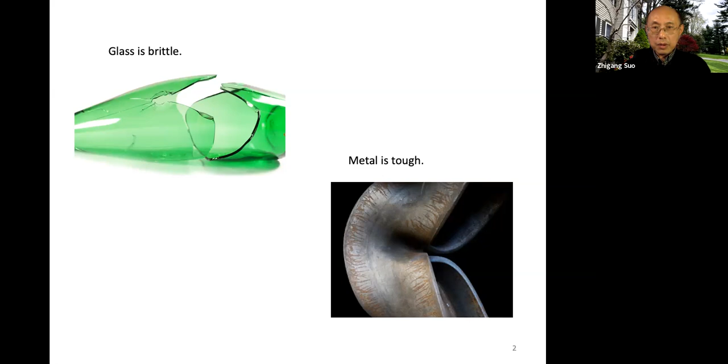All right. So in mechanical engineering, we all know glass is brittle, it shatters, and metal is tough, it deforms plastically. So that's a common experience. Now for rubber, this rubber here seems to be different from glass and steel in some obvious ways, right? It's elastic. And it doesn't have much plasticity. So that's a third kind of thing. So in my field, I'm really particularly interested in something called toughness.

So if you have taken a course on fracture mechanics, or actually if you shatter anything, you know things will fracture. Now here's a little history about fracture. We just heard 1921, Griffith wrote a paper about fracture of glass. So he said the glass fractures because you have a crack. This crack breaks one layer of atomic bonds, all these other atoms remain intact. So the energy needed to cause a fracture, this is what we call toughness, is about 1 joule per meter squared, amount of energy needed to create one area of a crack. So that was his theory.

I have one more page about his theory from modern point of view, how this 1 joule per meter squared comes about. Now, actually, let's jump to here. In 1948, Irwin and Orowan said, look, metal doesn't look like glass. It has a plastic deformation. I draw here, didn't even draw a metal. It's some kind of a gel. I'll show you specific chemistry as an example later.

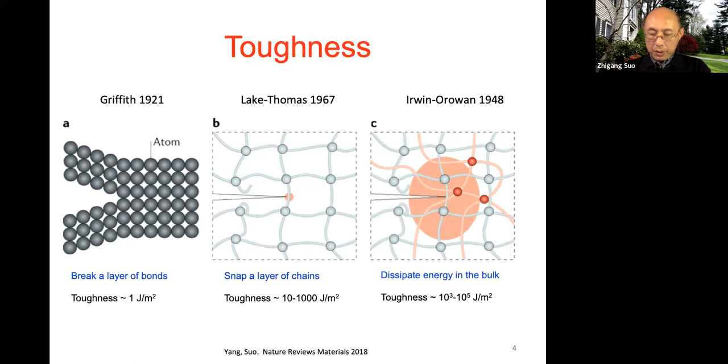Okay, now let me show you some detail. So you probably all heard of this equation, Schrodinger. He created this equation a few years later than Griffith. So Griffith didn't know this equation. Griffith measured this experimental value, 1 joule per meter squared. I'll show you roughly his experiment shortly. But he didn't know where this 1 joule per meter squared came from. But now we know it comes from the Schrodinger equation. There's no engineering really needed. You just look at this equation.

This equation is interesting. I write it in this stationary form. This is energy. Phi is a wave function. R is a distance. I only write the equation for the simplest model with 1 proton and 1 electron. So we're in a very lucky universe. All electrons are the same. Every electron has the same charge e and the same mass m, and this epsilon 0 is the permittivity in free space. It's essentially a universal constant. And this h bar is another universal constant. You probably studied this in high school, in college, whatever.

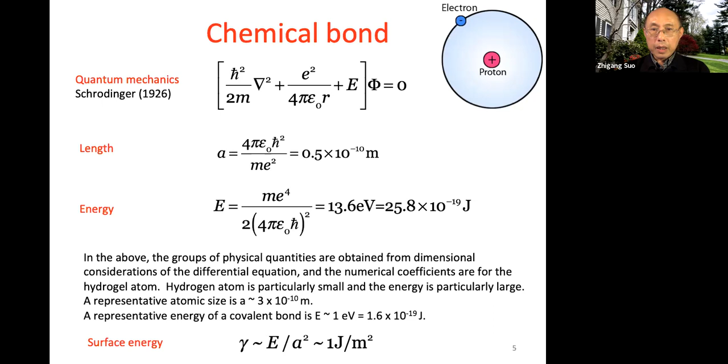Now, the Lake-Thomas model. This model we normally don't teach to students, not even graduate students. It's a very interesting picture, very simple too. I already said the picture is when a crack comes along, the crack really needs to stretch the entire chain. And when I break a single atomic bond, the energy dissipated is the covalent energy of the entire chain, right? Even though I only break 1 bond. It's not a very intuitive idea, but these guys thought about it. So the model is very simple. This is a scaling model, really just scaling.

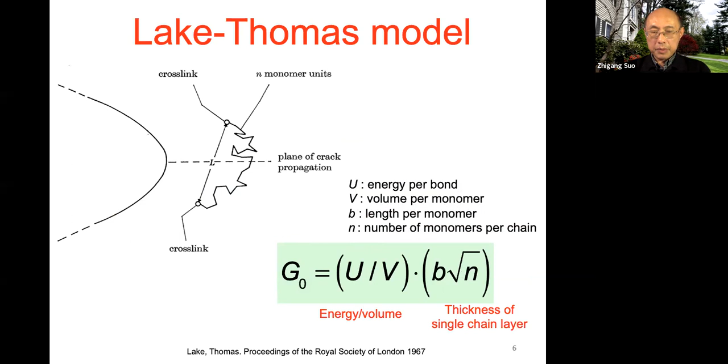This is energy per bond, volume per monomer. So this is energy per volume. Then I need to multiply by the thickness of this one molecular length. I don't have time to go through the detail. This is called a random walk model because for these chains, the end-to-end distance is given by a random walk, where b is the length per monomer and N is how many monomers along the chain, so it has to be a square root. So this is the thickness of a single chain layer. That gives you a number; I'll show you numbers later. So that's in a nutshell the Lake-Thomas model. It's a classical model.

Now, I also need to tell you, in just 1 page, how this idea of plasticity works to give you toughness.

Now, oh gee, this computer becomes super sensitive.

We all know the stress-strain curve, right? For metal plasticity, when you apply a load, this part is elastic, you can reverse, but starting at point B you have yield, so you have plasticity. At any point you decide to unload, it doesn't go back. You have a hysteresis, you come back to D. So this area is energy dissipated as heat. Some people call it plastic work.

It doesn't have to be metal plasticity. Anytime you have a stress-strain curve with this kind of hysteresis, you dissipate this amount of energy. Now, suppose you have a crack going through something like a metal or plastic, anything that has dissipation. You apply a load to push this crack ahead. This crack not only needs to break atomic bonds, it also causes plasticity on a large scale, typically millimeters or 100 microns, very large compared to atoms.

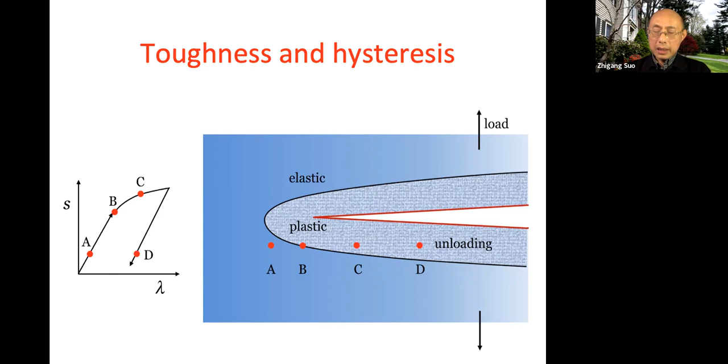So as the crack moves forward, each material particle goes through this A, B, C, D, right? Each material particle goes through this hysteresis and dissipates energy. And now you dissipate energy over a macroscopic scale, not the atomic scale. That's why toughness is so high for metals. So that's the picture for metal. It was known in 1948.

And this is a much later picture of what happens in something like rubber. In my group, we work with soft materials. For rubber, we all know it doesn't really undergo plasticity, because you stretch a rubber, and when you release your hand, the rubber comes back, right? So, let's see. As a result, most people say, if I measure the stress-strain curve, it looks elastic going up and elastic going down. There's no hysteresis.

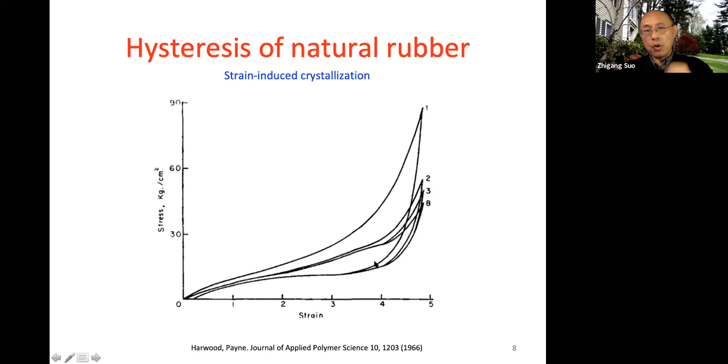That's not true. It was discovered about 100 years ago that natural rubber can crystallize under stress. When you stretch rubber, the rubber chains become straight and they crystallize. When you release, the crystals melt. So under stress you form crystals, and when you release the stretch they melt. It actually has a hysteresis. This has been known for nearly 100 years.

They said these two quantities, the work of fracture and the dissipation, the hysteresis energy, are correlated. When your hysteresis is big, you have a very big work of fracture. If your hysteresis is low, going up and down along the same path, you have very little toughness. This view was unchallenged for many decades.

I don't know, Thomas, if you teach fracture mechanics, you probably keep telling students, I tell students too, if you want a high-toughness material, you want a high-dissipation material. We keep perpetuating this view published in Nature and held strongly by most engineers and people on the street. That view turns out to be wrong. This is what I'm going to tell you.

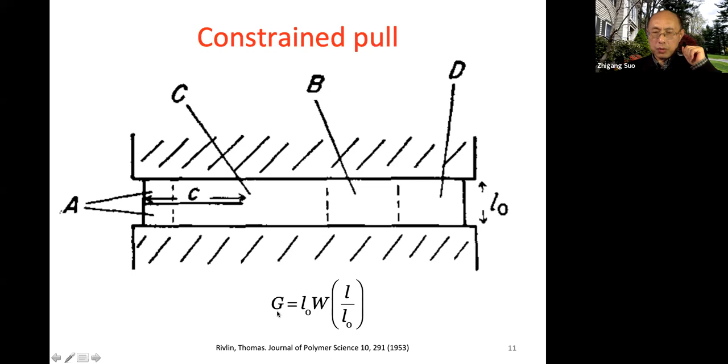All right, so now I'm ready to tell you about fatigue. It's not COVID fatigue, it's mechanical fatigue. The observation was first systematically reported by Thomas in 1958. He was testing rubber. This phenomenon looks like this. If I make a little cut here, we already know if I need to tear this apart by just monotonic loading, just keep going up until the crack jumps ahead.

That is toughness. For natural rubber, this number is easily 10,000 joule per meter squared. Very tough material. You can try it yourself. Rubber, very tough material, much tougher than steel, than glass. This is called toughness. Then he made a discovery.

He said, if I do cyclic loading, going up and down, with the stretch as a function of time going up and down, then this crack will go a little bit ahead each cycle. This is called fatigue crack growth. This is what mechanical engineers talk about as fatigue. So then he measures this crack extension per cycle, dc/dN, as a function of G. G is how much load I apply, in units of joule per meter squared.

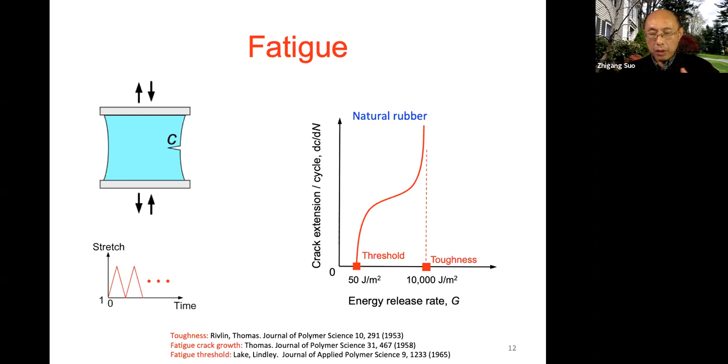As I told you, the discovery is almost as old as me. Same age, right? So it's a young discovery, put it that way. It has been there for all these decades, waiting for us to break this record. I'm very excited about breaking this record. Not only for rubber, eventually I'll tell you about other things as well. I think it's generic.

All right, so this is a picture from the famous Lake Thomas paper, 1967. The point they were making is, yes, your toughness is way higher here, right? But your threshold is here, 50 joule per meter squared in the old unit. This number is 50 here. So remember,

for natural rubber, you have a potent hysteresis mechanism by strain-induced crystallization, and when you reduce the strain, you melt. There's crystallization and melting. It is a wonderful material, right? This hysteresis gives you this enormous toughness, 10,000 joule per meter squared. Now, if you shut off all this melting, and so people do experiments.

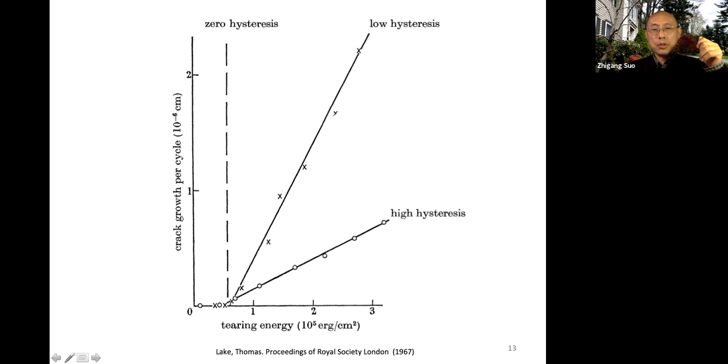What if you do the experiment at a slightly higher temperature, so you cannot crystallize? Then you only have a threshold. This is the Lake-Thomas picture. This is a chain being stretched all the way to the covalent bond, and it's elastic unless you zip it. And this is a threshold. So their paper says you always have this threshold. It's small, it's always there, 50.

So our game is first to give a name to this mechanism. It's a more generic name. We call it elastic dissipator. It's elastic until it breaks. But when it breaks, it just dumps all the energy along the chain. So our task is to amplify this elastic dissipator all the way to 1,000. Then we will have a really, really fatigue-resistant rubber. Right, that's the game.

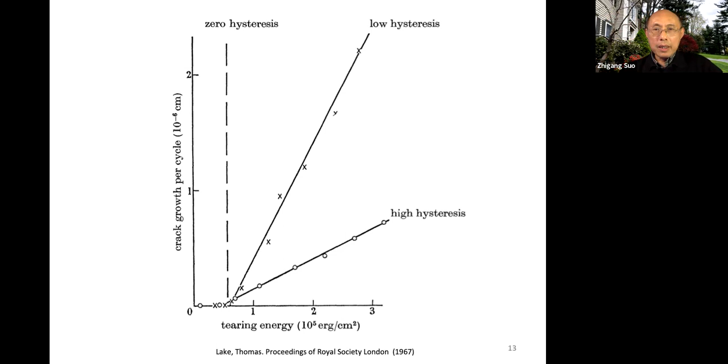This part is not even planned. I want to show you our result. The plan is for the rest of the materials. How about steel? How about ceramics? All these composites. Purdue is very big on composites. So that's the planning part. Okay, now let me first tell you what we have already done, the basis for the plan.

I need to tell you a little history of a material I've been working on for the last decade or so, more than a decade now. It's called hydrogel. Hydrogel has this molecular picture. You have a polymer network, almost like a rubber, but it also has a lot of water in it, 90% water typically. People are familiar with hydrogels. Lots of your food, tofu is a hydrogel, and jello is a hydrogel.

People are hydrogel because your body has 70% water in it. So your brain is hydrogel, for example. Your liver is hydrogel. Your bone is hydrogel. Everything is hydrogel, right? The only thing non-hydrogel is blood. Blood is not hydrogel, but blood flows.

But of course, synthetic hydrogel has a relatively short history, starting in 1960. The first application is the contact lens. We all know contact lenses, right? It's hydrogel. And in the 1980s, people developed the superabsorbent diaper. These are massively produced applications for hydrogels. They only follow food. Food, I guess, is the biggest market of hydrogel.

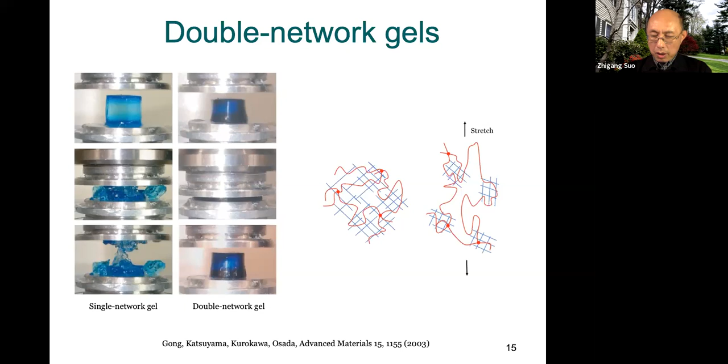But in this case, the blue network and red network both contribute to the toughness. How's that? What happens is the following. When you do fracture, the blue network has such short chains, it's very brittle. It breaks, but the red network doesn't break. However, when the blue network breaks, it breaks over a large space, on the order of 100 microns. That dissipates a lot of energy. So it's a new mechanism of plasticity using two networks. That's her work.

So we were followers of this work. It took us a long time, but we eventually published it in 2012. So here's our gel. It's highly stretchable, and at that point broke some records. This is our hydrogel. The hydrogel is transparent. You see a black background.

So the hydrogel is this big, and we grip it with the two plastics, and then we pull this 21 times, it doesn't fracture, it has a rubber-like feeling, right? And remember how we measure toughness. We need to make a cut and pull this again until the crack pops ahead. So when we do this material, we pull this 17 times, the crack doesn't pop, doesn't move forward. So that translates to toughness of almost 10,000 joules per meter squared.

I was very disappointed the student couldn't make it 10,000. The 10,000 is a landmark, it's natural rubber. So by now we and others already broke this record. This is a 2012 record. Remember, this material can have about 90% water and is almost as tough as natural rubber.

In comparison, tofu, jello, people have a sense of this number, 10 joules per meter squared. And most gels, 10 joules per meter squared. Contact lens, we just showed 100. Cartilage, the toughest material inside the human body, is 1,000. Natural rubber 10,000. So this was a sensation. And also this paper got a lot of citations by now, also because it shows a simple principle. You can do something like this.

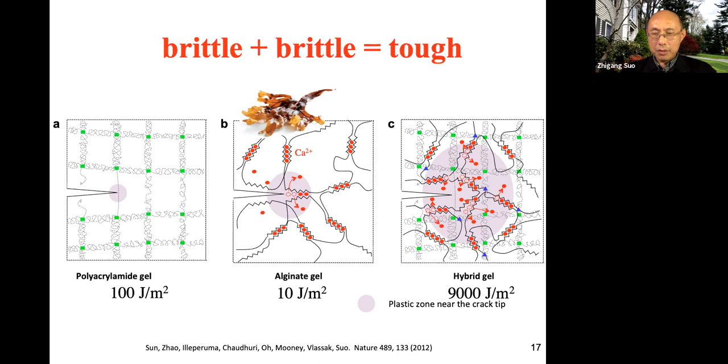So I have one student in the group who did something. So let's say we start with something simple. Let's just do this polyacrylamide. Polyacrylamide, we said it's nearly elastic, like a spring, right? A spring is not supposed to fatigue, it's an elastic system. So here was my hypothesis. An elastic network will not suffer fatigue, right? So Thomas, you're there, right? You must agree with me.

It's a reasonable hypothesis. So the poor student tested for nearly 2 years. He had fatigue. So I refused to publish until he had no fatigue. But then at the end, I'm a reasonable scientist. I admitted defeat. I sent my concession to him by publishing this paper. So the paper was finally published in 2017.

My hypothesis was wrong, and this material suffers fatigue. Let me show you the experimental picture. Before I show the picture, I first show you this material is nearly elastic. So we stretch double the length, or even 9 times the length. It's a huge stretch. You can see the hysteresis loop, especially after 1 or 2 loops, the hysteresis is just negligible. So this is a nearly elastic material. Polyacrylamide has a near perfect elasticity.

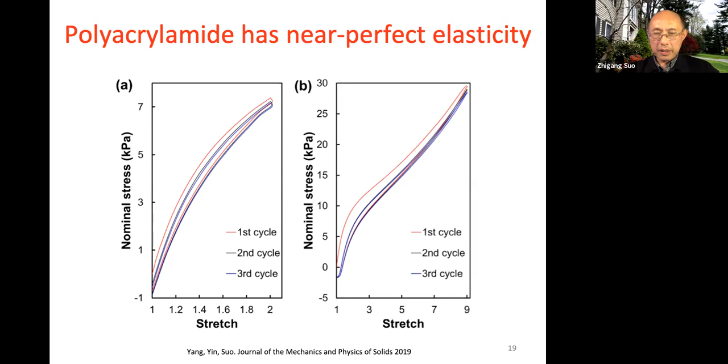So I have some ground to believe this material is fatigue free, but I have to accept the defeat, right? So people have to accept defeat. Doesn't matter who you are, right?

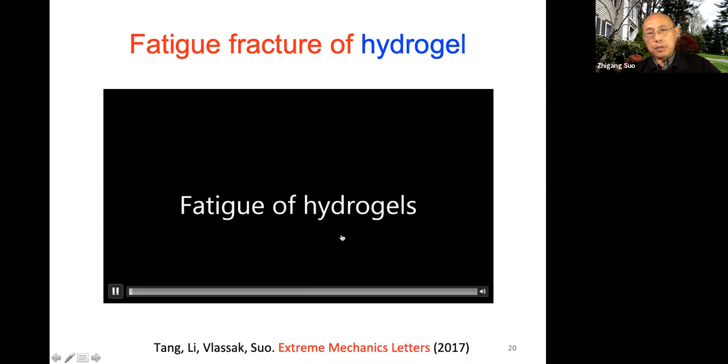For fatigue people, serious professional fatigue people, they need to test this a million, billion cycles. So right now the crack is still at the first mark. Let me accelerate this thing. So just move forward. So this already approaches the second mark, right? So under cyclic loading, even this very elastic material, nearly perfect elastic material, still suffers fatigue. So yeah, my hypothesis was wrong.

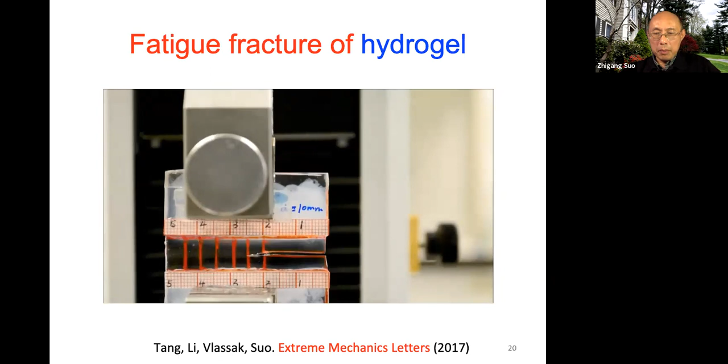This poor student finally published his paper. By the way, both students now are professors. This is my colleague, next door colleague, Joost Vlassak. So we published this paper. In that paper, we couldn't even propose a mechanism. We speculated why we failed. At the end, we just mumble. Even to this day, this is a new form of mumble. After 2 years, we still mumble. Here's the mumble: a new hypothesis, why nearly perfect elastic materials still can suffer fatigue.

So if you have a crack in a really perfect network, meaning each chain is identical, then you have a strain concentration, right? When the crack is coming along, you break this, break this, break this. All these other things will not break. So you should not have fatigue. Either the chain breaks or it doesn't break. There's no fatigue. Cycles make no difference.

However, if you have a realistic network, a realistic network is not perfect. So some chains are shorter than other chains. So this black chain may be longer. This chain may be shorter. So when this crack is coming here, maybe this chain doesn't break. You already break this chain because this chain is too short. So all these short chains, when you do monotonic loading, really contribute to toughness. That's why you have toughness, high in this case, 10,000 joules per meter squared.

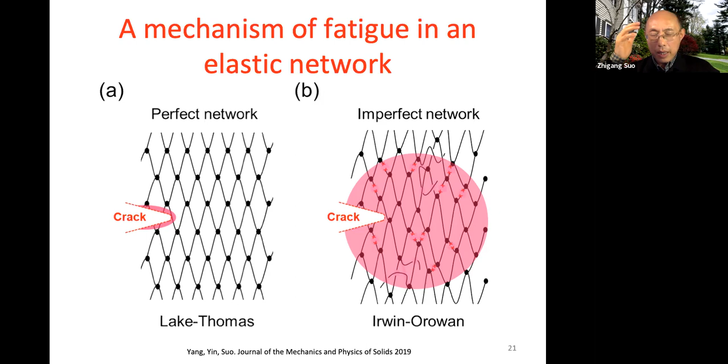Now, however, if you do cyclic loading, maybe you already broke this chain in the previous cycle. Then of course, in your next cycle, you will not benefit from this anymore. So the crack can grow, right? So that's our hypothesis. We don't know how to really definitively prove this. We are engineers, so we move on. We have some understanding of what's going on here.

So finally, we had the courage to test this tough hydrogel with tremendous hysteresis, right? With this unzipping. First of all, this material, this we knew for a long time, has enormous hysteresis if you just test it without a crack. Enormous hysteresis in the first cycle. After the first cycle, you unzip a lot of ionic bonds. Later cycles have a tiny hysteresis, but it still keeps damaging, even after 10,000 cycles, something like that. You keep damaging. It's not a great material if you're an engineer, right?

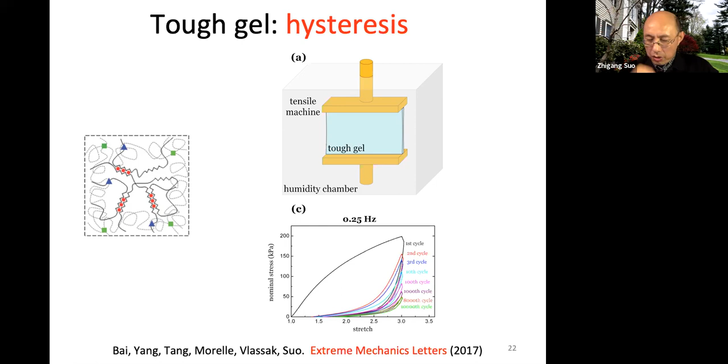Okay. So if we test the cyclic fatigue, dc/dN, growth per cycle, as a function of energy release rate, indeed, the threshold is 50. As bad as natural rubber. Remember, this material is as good as natural rubber in monotonic loading. So in 2017, 5 years after our Nature paper, we were not too embarrassed to tell the world our material was not very good, but as good as natural rubber. So it's not terrible. Natural rubber is a gold standard, right? So that was the status.

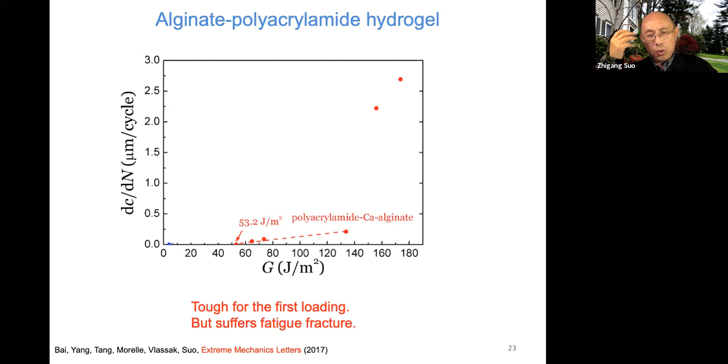So we need a new idea. This hysteresis gives you a lot of toughness. This old story: you make new material, but it suffers old fatigue. So we need a new idea. Here is one new idea. It's what we now call elastic dissipator. We published it very recently, last year. Now, the idea is actually very simple. It's an idea people in fiber reinforced materials would know. So here we have a fiber. Our fiber is an elastomer, a stretchable material.

And the matrix is also a stretchable material, but the matrix is more compliant than the fiber. The fiber has maybe 10 times the Young's modulus of this matrix, right? Soft matrix, stiff fiber, but the fiber is still stretchable. Both are elastomers because we're interested in making soft materials.

Now look at what happens. Mark one material particle by a square. I'm going to put a square marker here. Because this matrix is so soft, when I load this material, I will have an enormous blunting because the matrix can shear. I represent shear by a parallelogram here; the material sheared this way. And look at the next fiber.

Because there's an enormous blunting, I deconcentrate stress. The stress is nearly not concentrated at the molecular level anymore. I deconcentrate all the way to a macroscopic distance. This distance is governed by how large the fiber is, right? So in our case, this distance is easily a millimeter or centimeter.

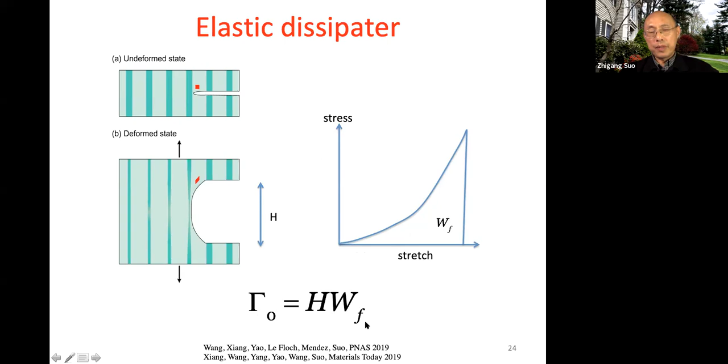So how enormous? We did a measurement. I already told you how we measure toughness and hysteresis. In particular, we're going to report hysteresis as a ratio: this hysteresis loop area WD divided by the entire area under the loading curve, WD over W. When this number is 0, you have no hysteresis. The loading and unloading curves match. This is purely elastic.

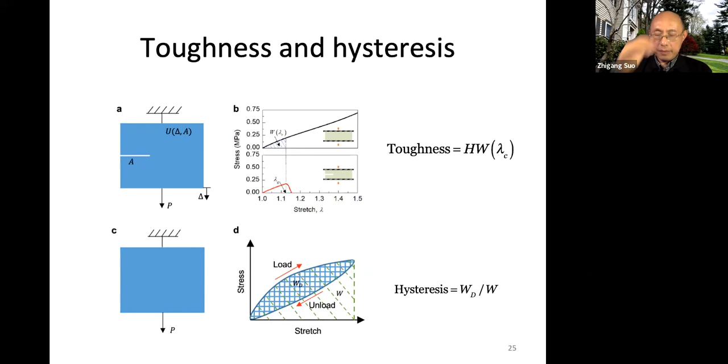If this number is 1, it means total dissipation; metal is almost 1, right? Natural rubber is somewhere in between. Now for polyacrylamide, it's less than 10%. All right, now here is our result.

Now, if you think about applications of metal, we seldom use the hysteresis of a metal in applications. First of all, it suffers fatigue. Second, you dump so much energy as heat, and you can only use it once. It's not a very good material. So all these materials are troublesome, except for natural rubber. Natural rubber is interesting because the crystals are forming and melting, forming and melting, so it gives you a feel of coming back to the origin.

However, it dissipates. Now, if you test it unfilled, without carbon, at a relatively small strain, natural rubber actually has a very small hysteresis, less than 10%. So for many years, people knew only very few materials, such as natural rubber, that give you small hysteresis and high toughness. Natural rubber does this.

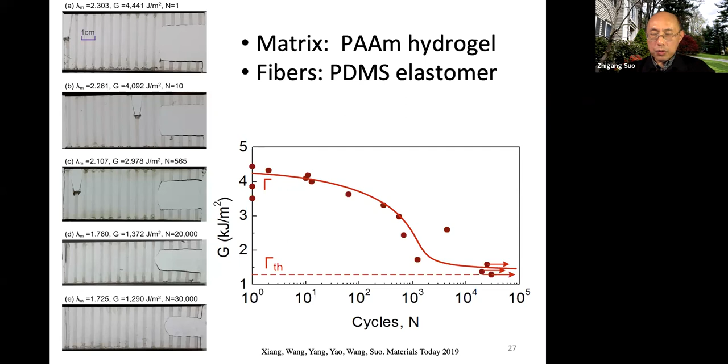So let me tell you the result. I will put these slides online after the talk because I have to jump over a lot of subsequent work. I want to reach the punchline. I'll put the slides online.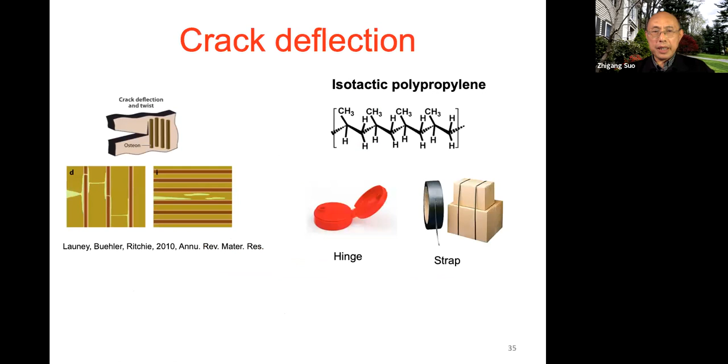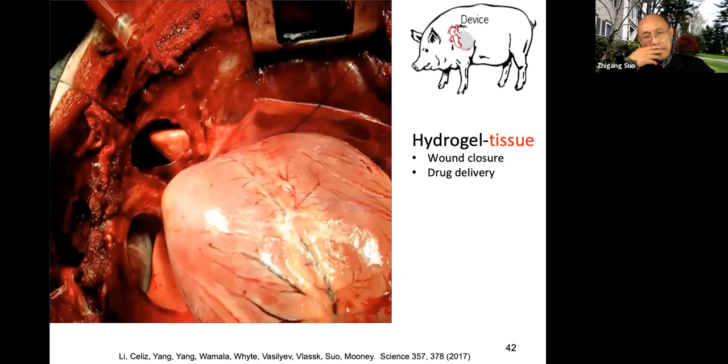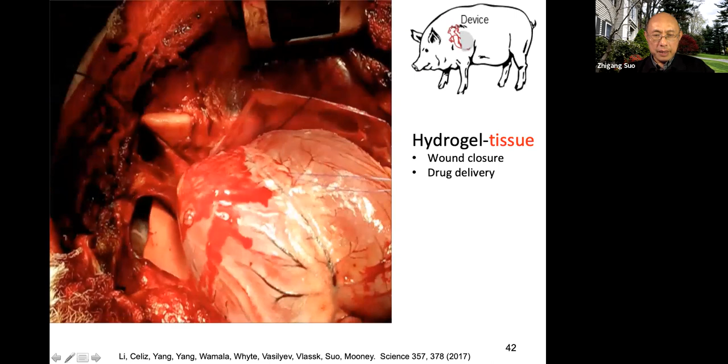All right, so I have several other examples. Let me just jump to one application example. Again, I apologize. So let me give you one application. This is one application we made with a bioengineering group, David Mooney, my same-floor neighbor at the university. And these two students are professors now.

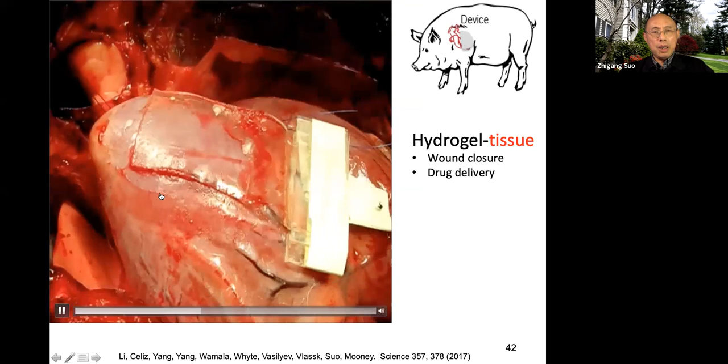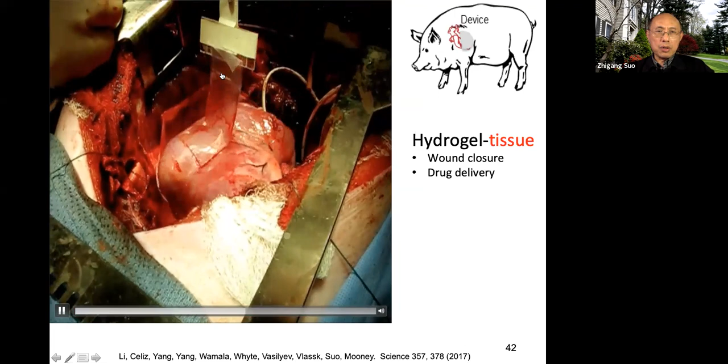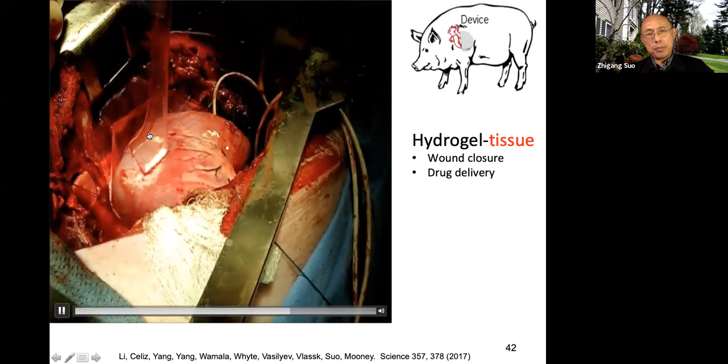So here we make a tissue adhesive, on heart from pig. We first do a peel test. This is our tough gel. You can see it's very tough. I cannot tell you how high the force is, you cannot sense it, but you can see the stretch. Meanwhile, while you stretch, you have very strong adhesion. We developed a method to have very strong adhesion. The adhesion measured by this peel test is on the order of 1,000 joules per meter squared, several hundred to 1,000 joules per meter squared.

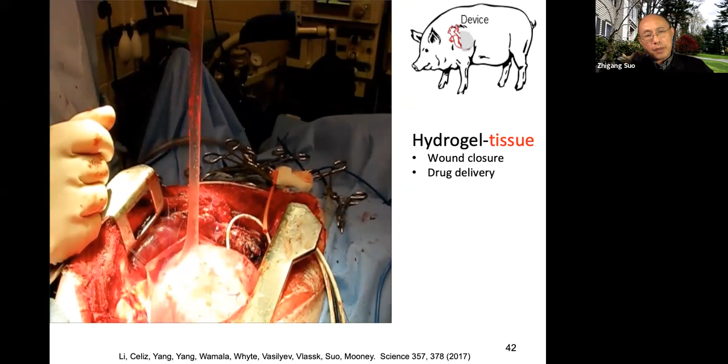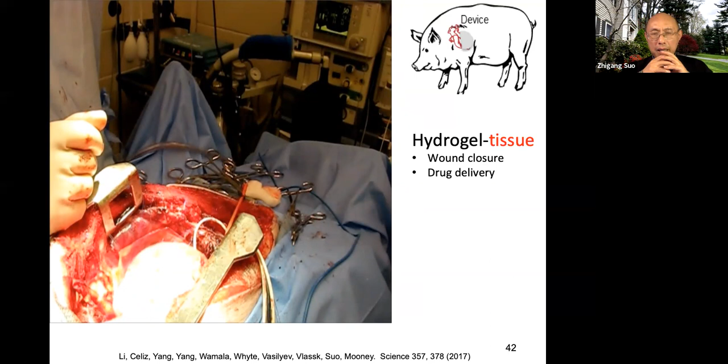Very tough adhesion. For these things, people have known for decades what they need, a need for decades: wound closure and drug delivery. This video was a world-first video that shows tissue adhesive can be this tough. It's a world record. By now, there are many demonstrations with different chemistry. I didn't have time to illustrate the chemistry, I'll skip this. The principle is really mechanical. Many chemistries fulfill this principle.

Anyway, then Li became a professor. He was a student shared between my group and another group, and became a postdoc at Mooney's lab. When he was at Mooney's lab, he created this work, tough adhesion. And then he became a professor. He published a paper showing this fatigue threshold is about 10 joules per meter squared. Again, the threshold of adhesion is very low.

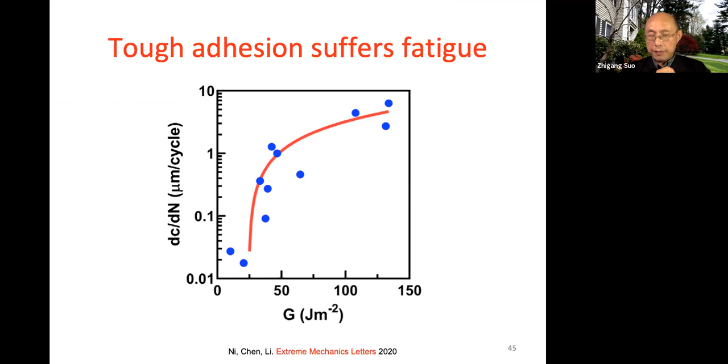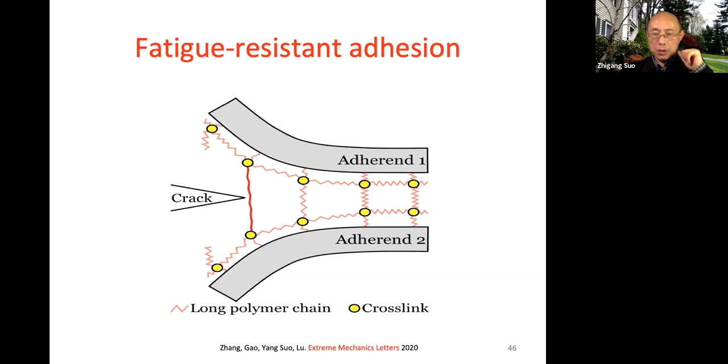So then here is our paper. Now we find a mechanism just by elastic dissipator. We can have adhesion fatigue threshold of multiple hundred joules per meter squared. Again, with this principle, all we need to do is have very long chains as an adhesive. Your adherend could be anything, even a hard material, could be steel, doesn't matter. All you need is very long chains, and you have an enormous fatigue threshold. So the general proposal is to take this as a lesson.

I didn't have time to talk about these other papers. So let me go to the summary. The summary is important. I rushed through this. I believe this is a genuine breakthrough in the entire mechanical engineering. It doesn't matter what you do. As long as you deal with materials, hardware, and want to fulfill some functions repeatedly, fatigue is an issue.

And fatigue has been a known engineering problem for more than a century. With a written record, people doing experiments for more than a century, it was an unsolved problem. I think in recent years, we cracked this thing open with this simple idea, the elastic dissipator. We already demonstrated elastic dissipators with a few materials. I showed you one in detail, but we demonstrated several materials. It shows high toughness, very low hysteresis, and an extraordinary, unheard-of high fatigue threshold for any material.

So I think we should go making a plan. Not many people worry about a hydrogel or even elastomer. People want to worry about the plastics, the composites, metals. How can we develop this idea, elastic dissipator, for metals, for example? So let's plan.